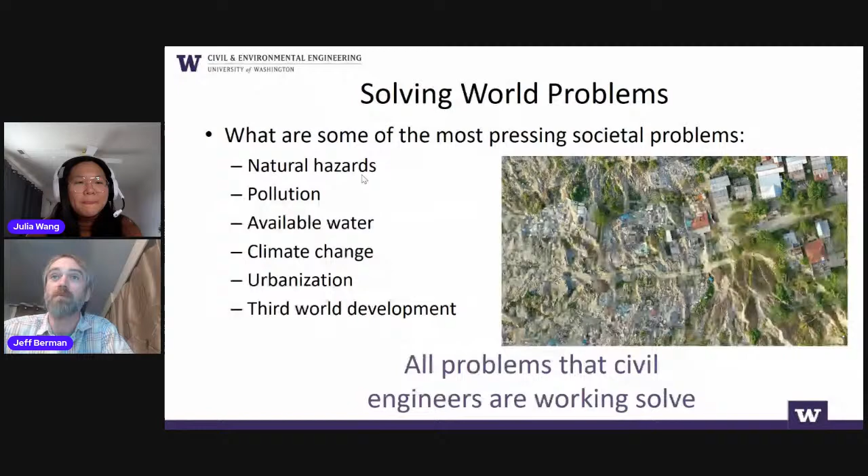So for those of you who don't know much about civil engineering, I just wanted to make a little pitch about the discipline that I love: helping people and figuring out cool ways to solve these really challenging problems. Civil engineering is really engineering for society, making society better.

There's structural engineering, which is part of civil engineering, which is what I do. There's geotechnical engineering, which is thinking about tunnels and foundations and landslides and a bunch of things like that. There's environmental engineering, making sure we have clean water and clean air. Transportation engineering, which I understand you've heard a bit about. Water resources engineering, which is making sure that we manage our water well and that we have availability of water. And then construction engineering, which is...

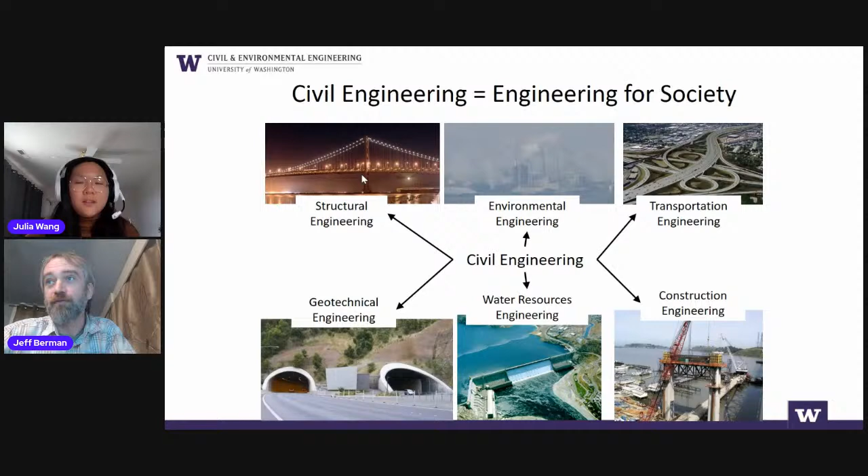Making all of these designs that come from the other parts of civil engineering actually happen, and figuring out how to build these big, fantastic solutions to these major problems.

So I'm a structural engineer. I thought I'd just take a minute and talk about what structural engineers do. We ensure safety and serviceability of structures, including bridges, buildings, and other large components of infrastructure. We try to creatively and efficiently use materials to achieve our economic and sustainability goals. And we often work in pretty big teams that involve people from a range of disciplines.

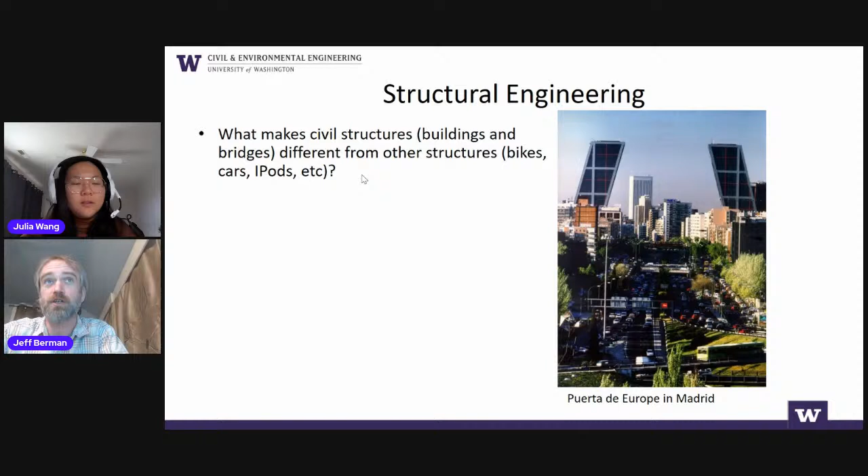So there are mechanical engineers who design bikes and cars, and they might even design the case for your iPhone and stuff, to make sure that your iPhone is robust. But there's a few things that set civil structures a little bit apart from some of those other structures.

Some of the things that we have to think about as civil structural engineers is really the scale of our projects are often very, very enormous. There's no prototyping, and we don't get to test our designs. We do a design and it's built and it's tested in the real world. There's no prototyping and chances to try things and get it right.

Often our designs are not repeated, they're very unique. Here you see the Puerta de Europe in Madrid, which is these two amazing buildings that are leaning, really, really interesting. There's only one set of those in the world.

The consequences of failure for civil structures are really, really high. If a building fails or a bridge fails, there are significant consequences. And our designs have to operate in this uncontrolled environment where we could have earthquakes and hurricanes, they just have to operate out there. That's why we have a whole licensure process. As a structural engineer, you have to get a license to actually design buildings and bridges. And they have huge social and economic impact, obviously.

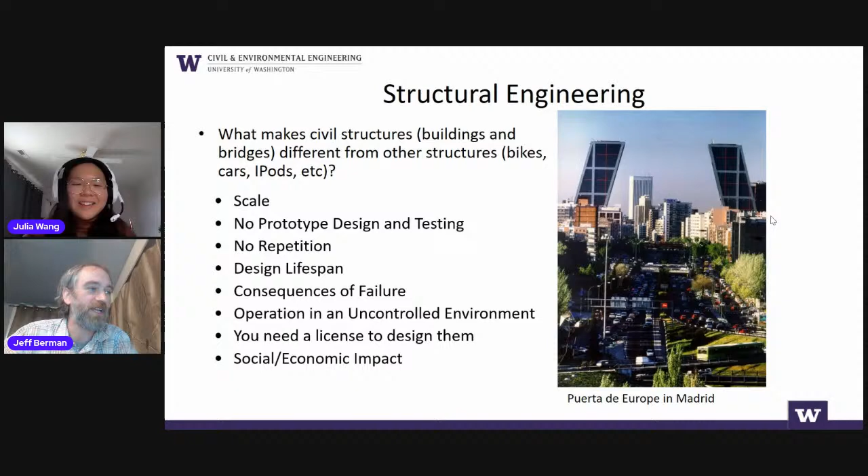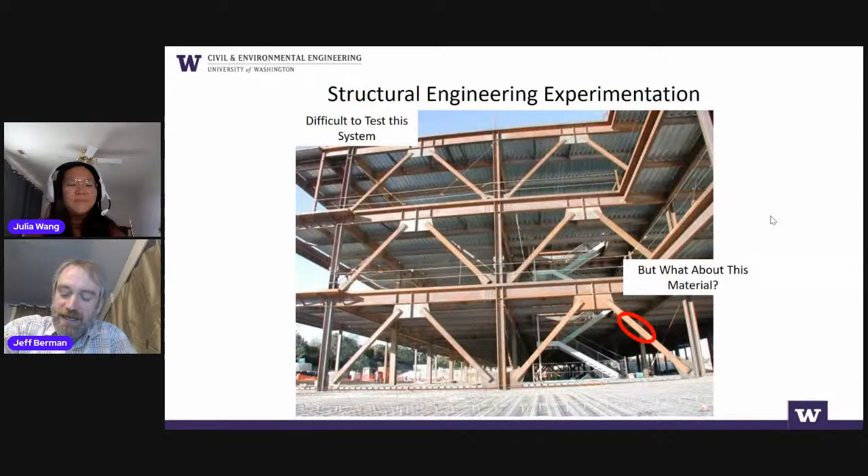So I did say it's difficult. We can't test this full building, right? It's not really possible to test this full building here. This is a steel framed building, and I don't know exactly what it's going to be, maybe an office building or something like that. But we do and can test, say, the material for the building, and we do that.

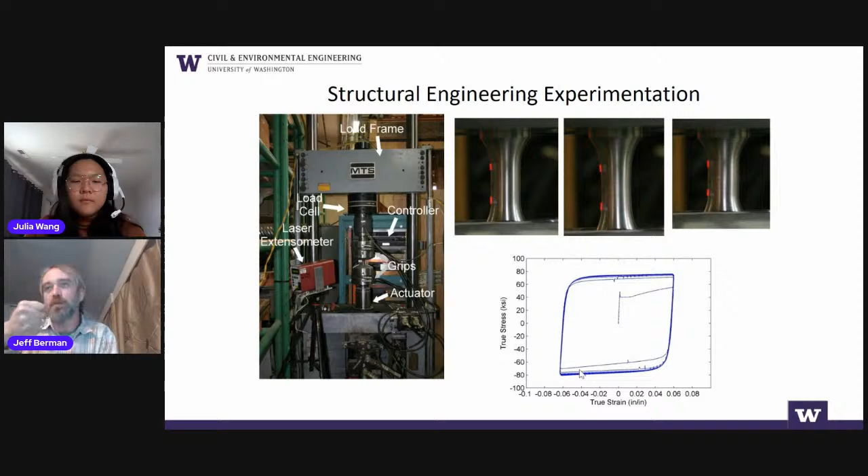So here's an example of in my lab, we're testing steel, just to make sure we understand the material properties for this steel. We put it in a machine like this, and we push it and we pull it, and we're able to understand its behavior, in terms of what we call stress and strain, or the force it takes to push and pull the steel versus the deformation of the steel, and that helps us understand its behavior.

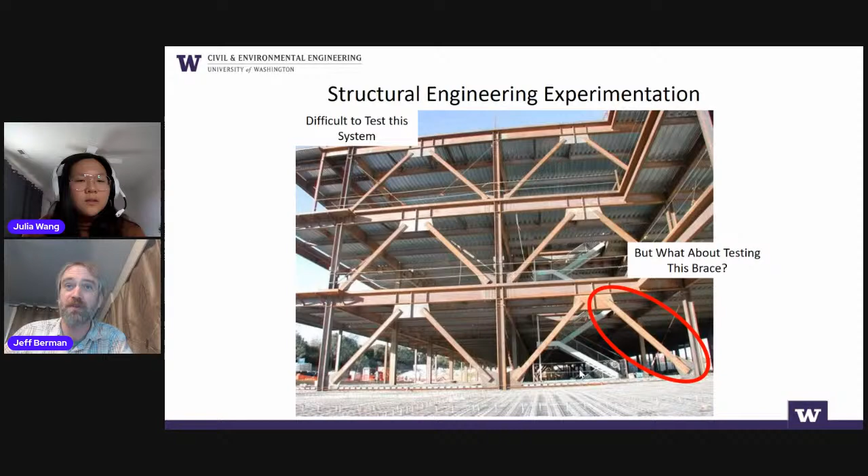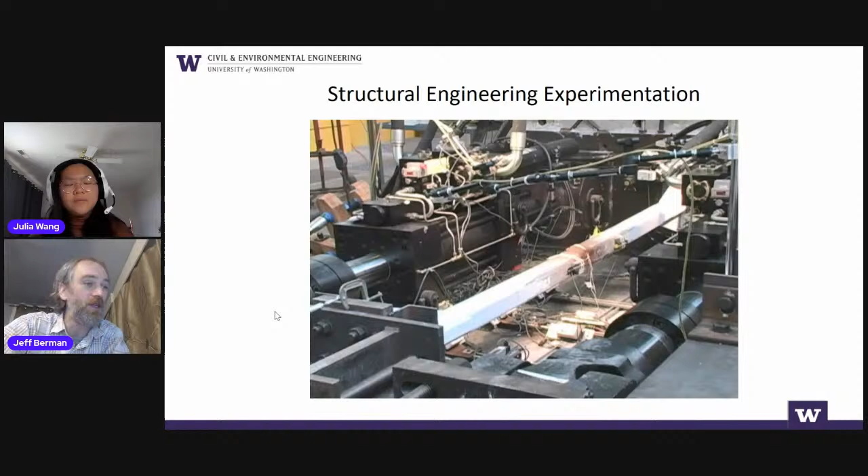I wonder, is this what they use- because I know in Japan they have a lot of earthquakes, and they've built their buildings to withstand those earthquakes. Do they use braces like these in order to do that? Absolutely, yeah. There's lots of different types of braces and things like that, and this is just one example. But yeah, absolutely, the technology used for resisting earthquakes in Japan and in the US is actually very similar.

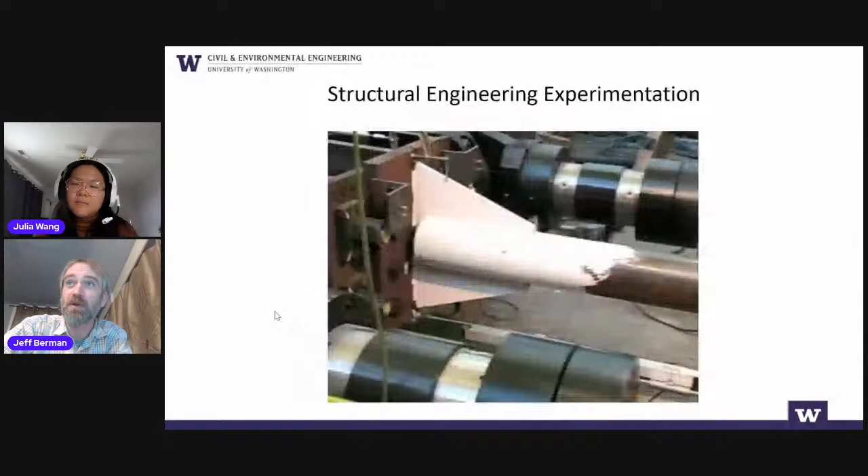And again, in my lab, we can't test the full building, but we can test, say, the connection. So just an example of some of the types of tests that we do to understand the behavior of the connection. This one's slowed way down, and we're going to see the failure of that connection, obviously. And my dog really liked it in the background there.

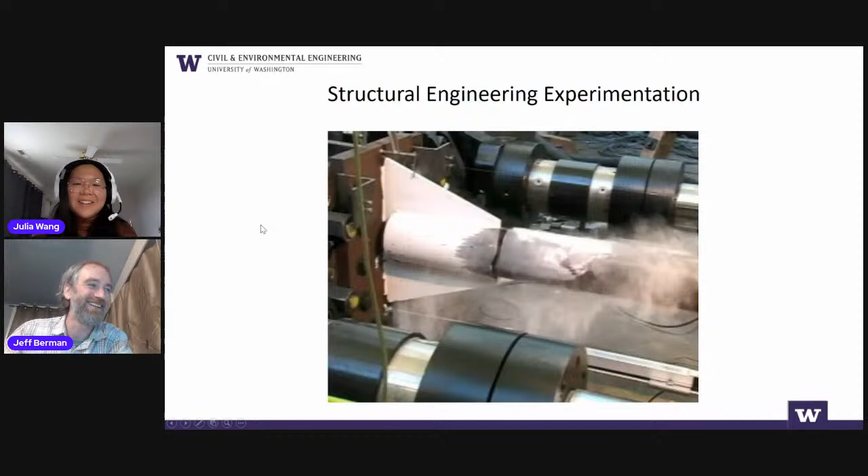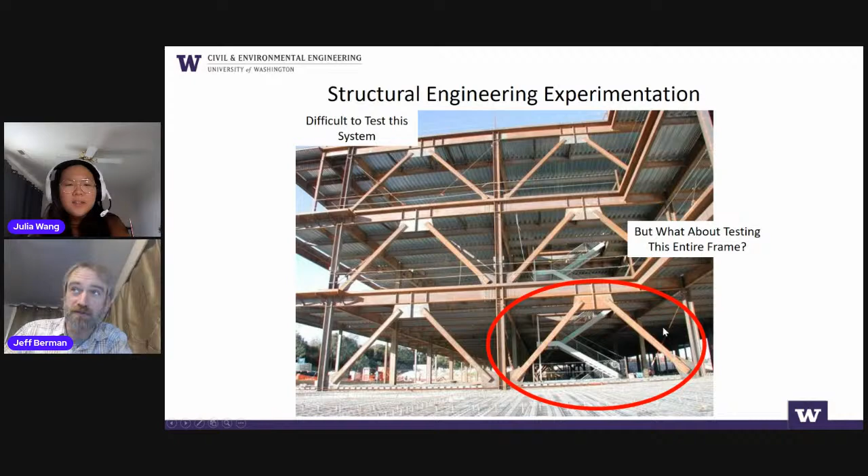There are some big labs around the world, and while they're not big enough to test this entire full 3D building, they might be big enough to test this entire braced frame, so we can figure out how that behaves. This is an animation of some testing where we actually were able to test a piece of the building. It's not the full building, it's just one braced frame pulled out of the building, and we're able to test that all the way to failure. You can see the braces fracture and do what they're supposed to do.

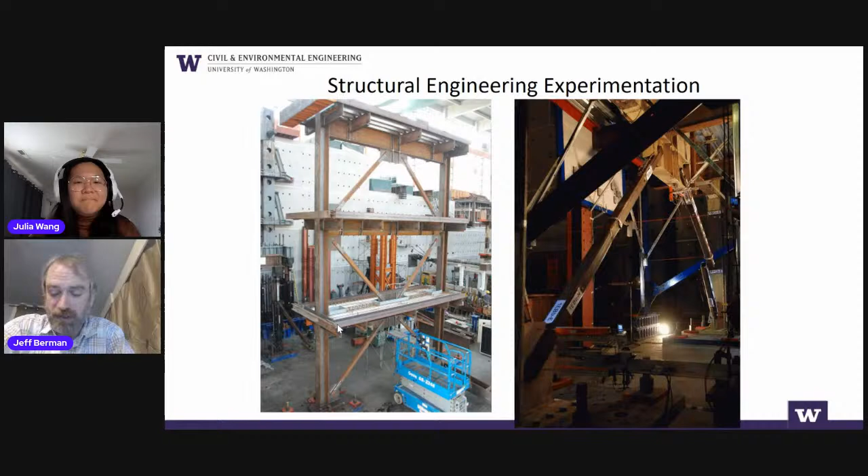The idea is that the braces end up damaged, but the beams and columns and everything that is carrying the vertical load and where the people are is fine. The building is safe after an earthquake, and you do have to go in and repair braces and things like that.

So what we do a lot of in structural engineering, and a lot of the work I do, is doing these kinds of tests both in the lab, and trying to learn about how things behave in the field too. Once we understand the behavior in the lab, we develop computational models that incorporate physics and a good understanding of mechanics, looking at material behavior and incorporating that into a complete model of the system.

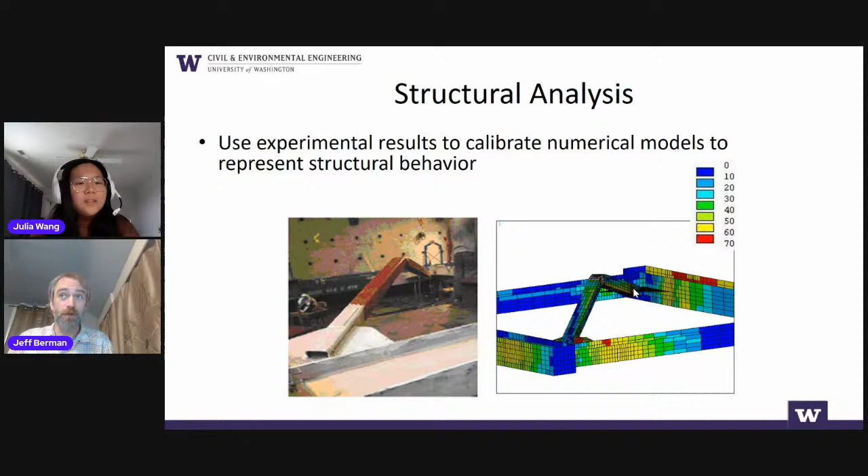Here's an illustration of us testing a brace in our laboratory, and then doing modeling in the computer that incorporates all the physical behavior we observe in the lab. We're able to simulate that behavior in the computer, and that's how we're able to go design safe structures for things like earthquake loads.

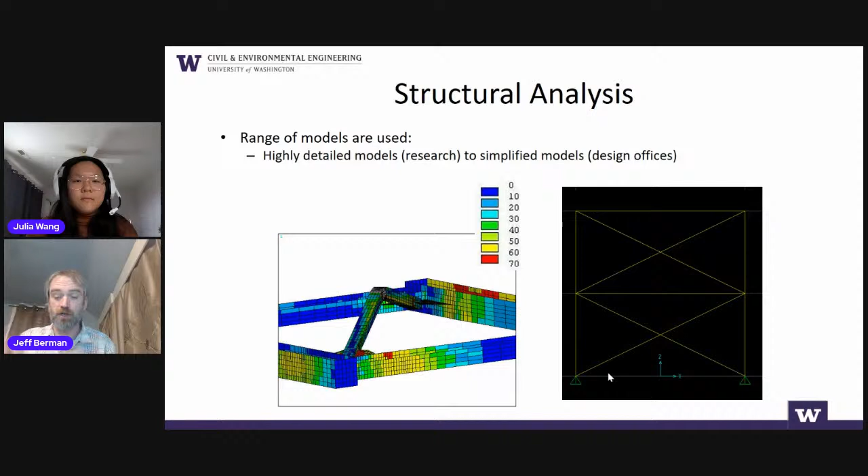We take these sophisticated models and simplify them for the designers who might design this braced frame in structural engineering design offices. They extend all of that and are able to design really large and complex buildings with the help of computers and models.

All this stuff is connected. We take our laboratory tests, figure out how to do really good computational models, simplify those models for design engineers to use in practice, and then they're able to safely design the buildings and bridges that make up our infrastructure. It's a whole process.

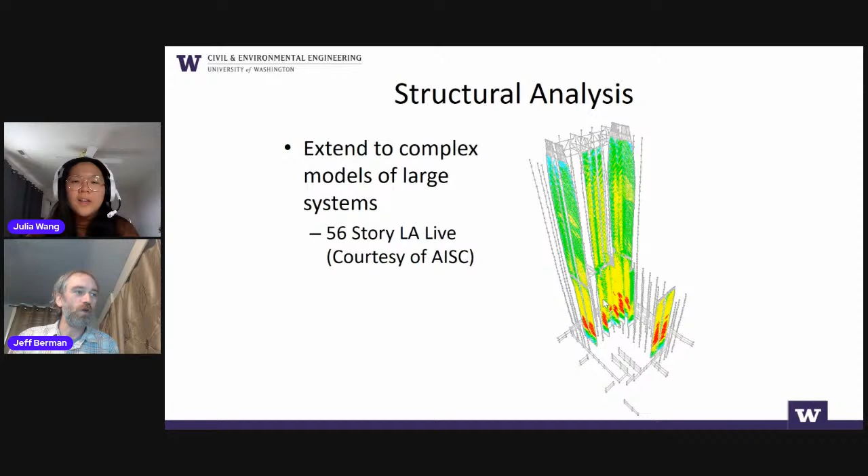If we think about what causes structures to be unsafe sometimes, what causes damage, there are natural hazards: earthquakes, hurricanes, tropical cyclones, tornadoes. There are man-made hazards, which could involve construction accidents, overloads, or malicious acts. There could be design errors or construction errors and lack of oversight. Much of the research and new innovation in structural engineering is aimed at improving structural safety in the face of these things.

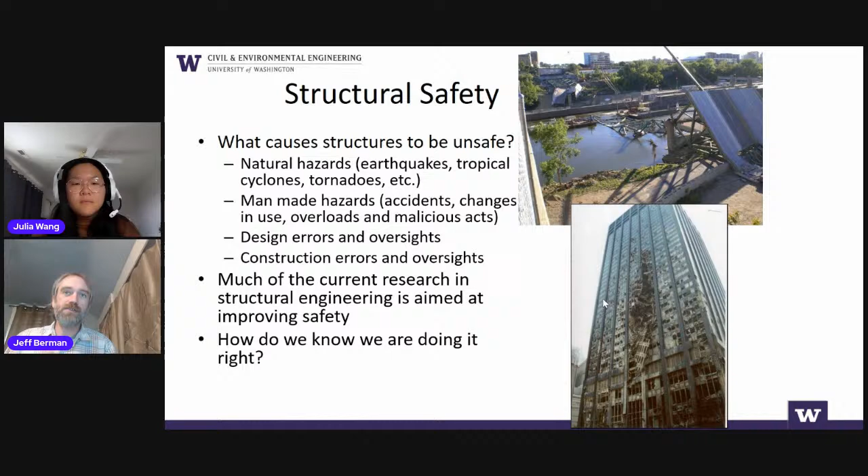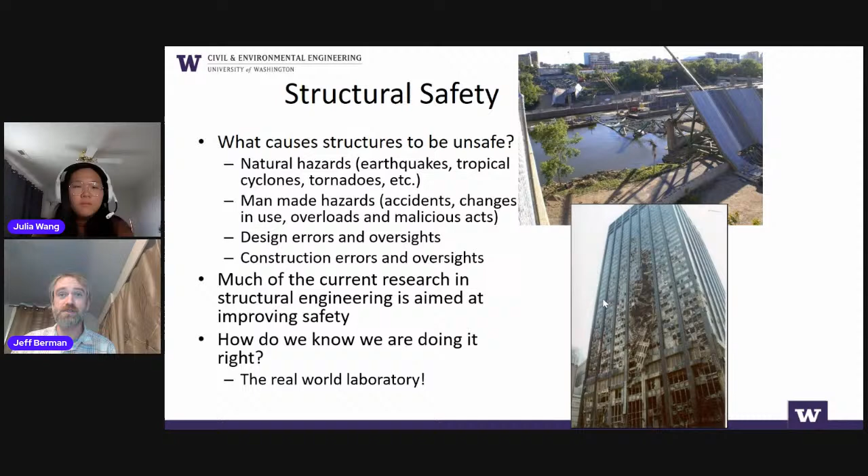One of our big questions is, how do we know that we're doing it right? I showed you some laboratory tests where we're working to test components, but we also have observations from the real world laboratory. That's what I'm going to talk about - how we learn using new technologies from the occurrence of natural hazards, and the work we're doing to understand how buildings and infrastructure perform in the face of large natural disasters.

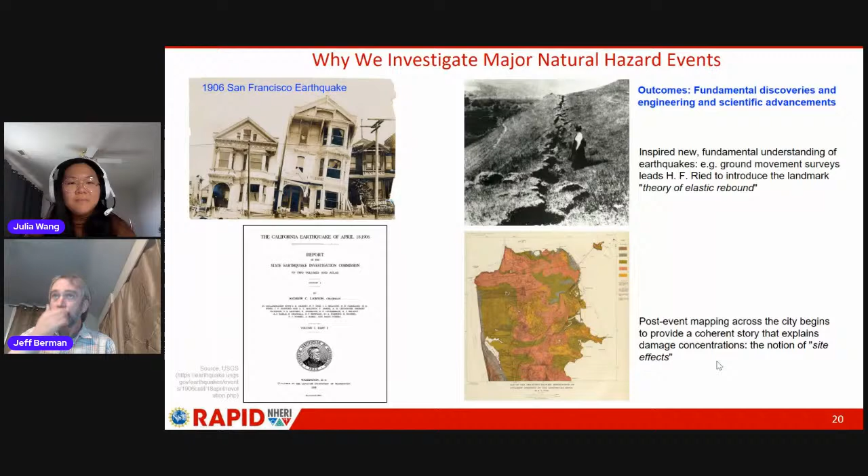Even as little as 10 years ago, there was this major earthquake and tsunami in Tohoku, Japan, and you may have read a lot about it. A lot of folks from the US, Japan, and all over the world went to Japan to try to figure out how we could learn from the impacts of that event.

They're making measurements about how far this building sank and moved, but they're doing it by hand, charting it out and writing things down. There's a lot of error in these manual measurements. But we were able to understand what happened to these buildings and to think about how we could do things better in the future.

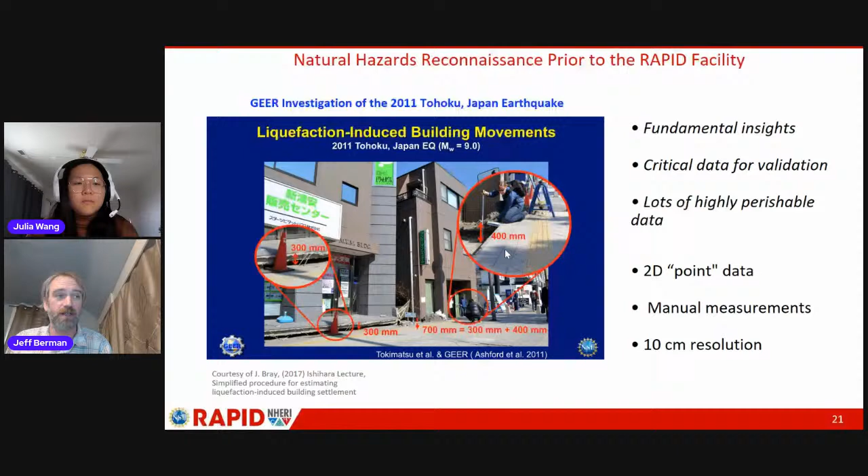But the center that I help run, this RAPID facility, we're trying to use new, awesome, modern technologies that allow us to capture data at really high accuracy and get these extraordinary pictures of damage to the built environment. So contrast those hand measurements that we were doing in 2011 with an investigation that we did in 2018 here.

This is using what's called LIDAR, a laser system. With LIDAR, we're able to send a laser beam out millions of times and read its response.

We set it up at a few different locations on a tripod. We can go to different locations, and then assemble all of this laser information into a 3D point cloud. It's essentially a 3D representation of everything the laser saw. There's a lot of work to assemble this, but we're able to get this full scene.

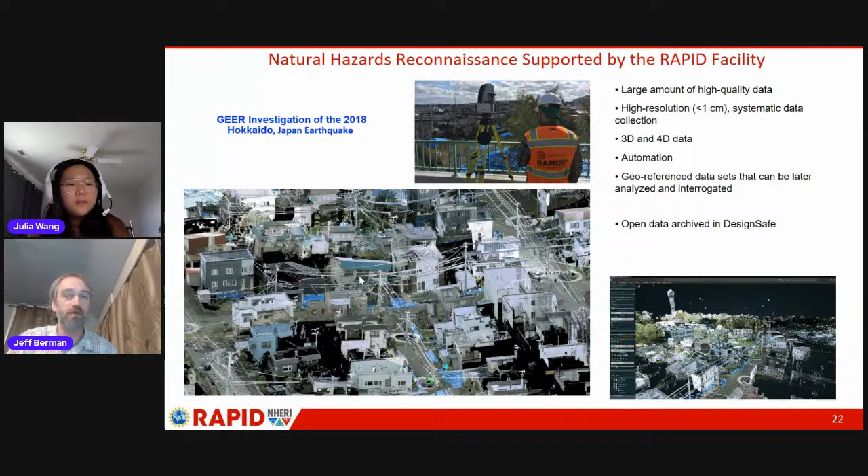In order to learn about that, we need all these case studies. We need to know that this building settled, and then we need to go figure out what the soil conditions were for this building, and then be able to know how much it settled. The development and capturing of all of these case studies is really important for us to figure out this type of damage that happens in earthquakes. So we have all these cool tools that we use to do natural hazards reconnaissance with.

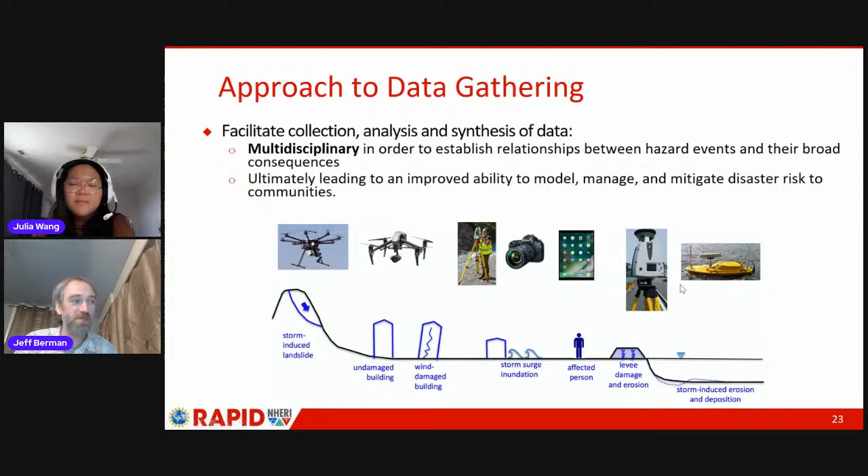So a lot of really interesting technology. I'll talk a little about some of the individual tools, and then I'll show one really cool example in detail of what we've done to understand building damage in Hurricane Michael. We have all these amazing tools.

We use advanced Geomatics Technologies, which let us capture 3D geometries of the built environment, including our LiDAR equipment and things like this. We have a bunch of equipment that lets us instrument buildings so we can understand how they shake in earthquakes, and instrument the ground around buildings to see how the ground is moving in earthquakes.

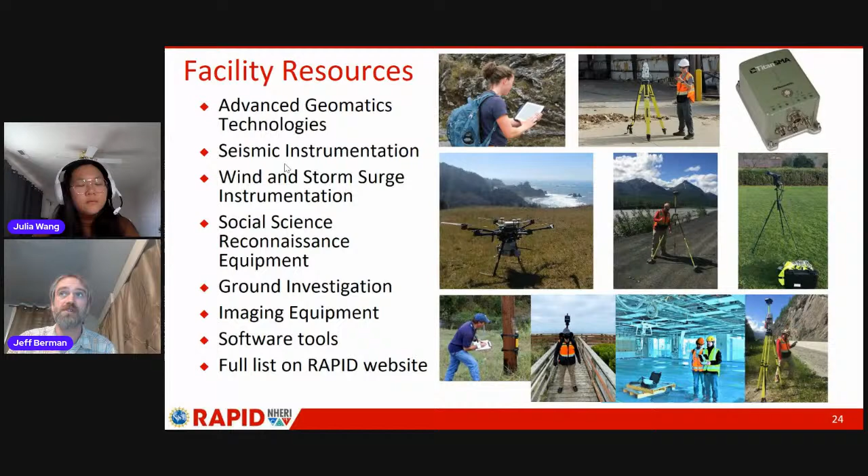Often earthquakes are unpredictable, so we can't put these instruments out ahead of time, but there are often aftershocks after earthquakes, and that's where we go and instrument a building. Once an earthquake happens, we get our instrumentation out really quickly so we can observe what's happening in aftershocks, which still tells us a lot about how buildings behave in earthquakes.

We have a full list of all this different equipment, and I'm going to talk quite a bit about laser scanners because that's one of the ways we can develop and capture these 3D images, 3D models of what a building looks like after a natural hazard.

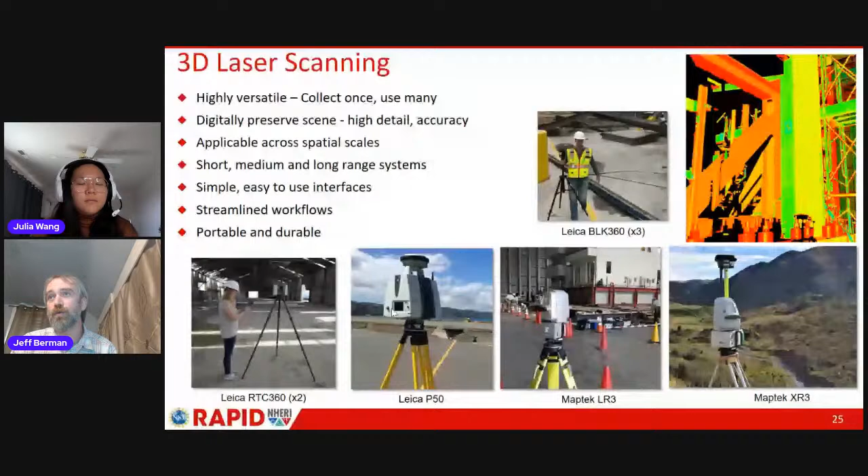I'll talk about how we use that information to understand what happened to the building during the natural hazard. We have a bunch of different laser scanners, and we don't need to know all those details. We also have a bunch of different drones, and the drones let us do a bit of what the laser scanners let us do, but on an even bigger scale.

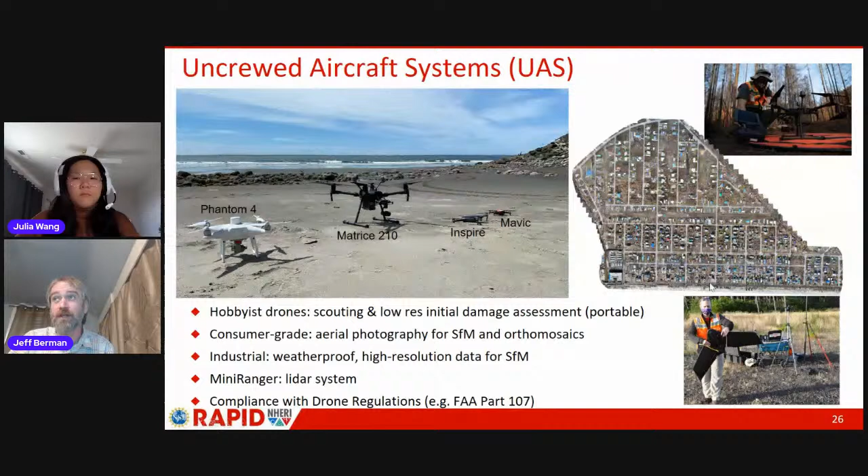We're able to take all of these images that the drones collect and put them together into a 3D model. So this is actually a 3D model of this entire neighborhood that was damaged in Hurricane Michael. We have lots of cool drones to do that.

And like I said, we have one drone that's really special, really big, really complicated and hard to fly, but it actually has a laser scanner on it. So this is a little laser scanner down here, and that drone has lots of special features so we can identify the exact, very precise location of the drone as it does its laser scanning down below. Here's an example of some of the data we can get from this drone.

So we go down to this landslide probably every 4 months, and we fly the drone with the laser scanner, and we're able to figure out how the landslide is actually moving and help Oregon State DOT figure out how to reinforce the hillside to slow the landslide down further so they don't have to repair the road as much.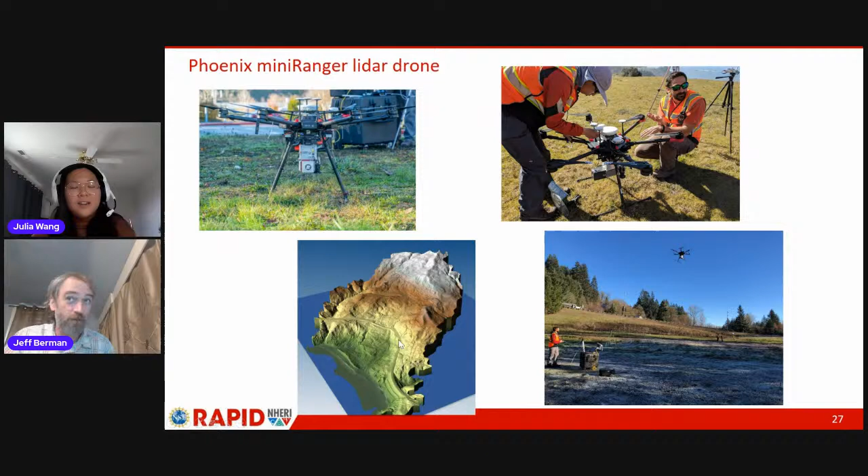So would that be considered pretty fast though? Yeah, I mean 0.5 meter a year is a big deal for this road. If the road is moving 0.5 meter, that means you have to repair the road every year, because it's cracking.

And then we've got all kinds of really fun imaging equipment — a couple different systems that are street view systems, a lot like the street view systems that Google drives around for Google Maps, where you can pull up 360-degree immersive environments. We've got 2 street view systems that are super mobile, simpler than Google's Street View system, but we can put them on a car and drive around right after a natural hazard event to document it really, really well.

We've got all kinds of different imaging equipment in addition to the Street View that lets us put together really interesting models. So this is a 3D model again, but this 3D model of this landslide was put together with images instead of laser scans. So it's not a laser going out; it's a series of images.

Because we can know the position of the camera, and things about the camera like the focal length, if we take pictures from different positions, we can figure out for each pixel in the image how far away the point captured by that pixel was from the camera. Using that information, we can assemble the images into a 3D model as well. That's called photogrammetry, or structure from motion — a series of computer algorithms that helps us do this.

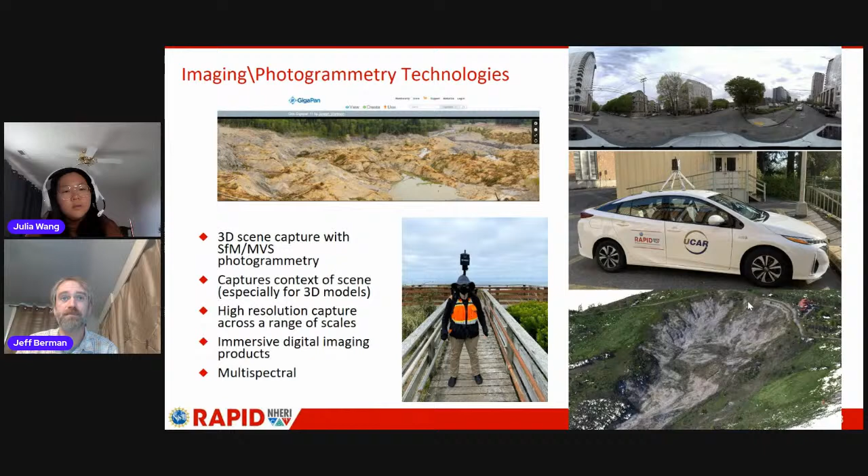Okay, thanks. And then I talked about our boat. We have a boat that we can send out to actually map the bottom of the surface as well. So that's all of our equipment. And I want to take the last 10 minutes to show you one example of how it's been used - our Hurricane Michael work - to show you a little bit about that.

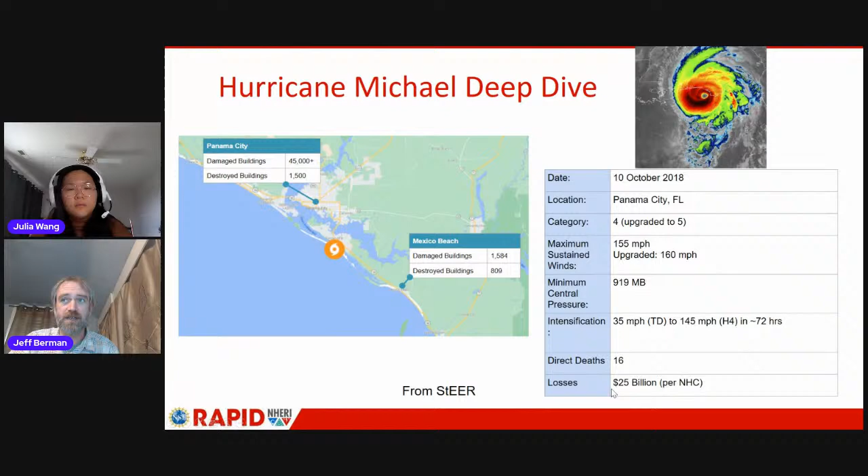Hurricane Michael was a huge hurricane. It was a Category 5 hurricane when it made landfall. Its impact was really around Panama City, Florida, and Mexico Beach, Florida. Those were the two communities heavily impacted. Mexico Beach, a small beach community, was pretty much totally destroyed - almost every single building there was destroyed. Panama City, a big city, had less damage, but still some really significant impacts. There were maybe 16 direct deaths, but over $20 billion, near $25 billion in losses from infrastructure.

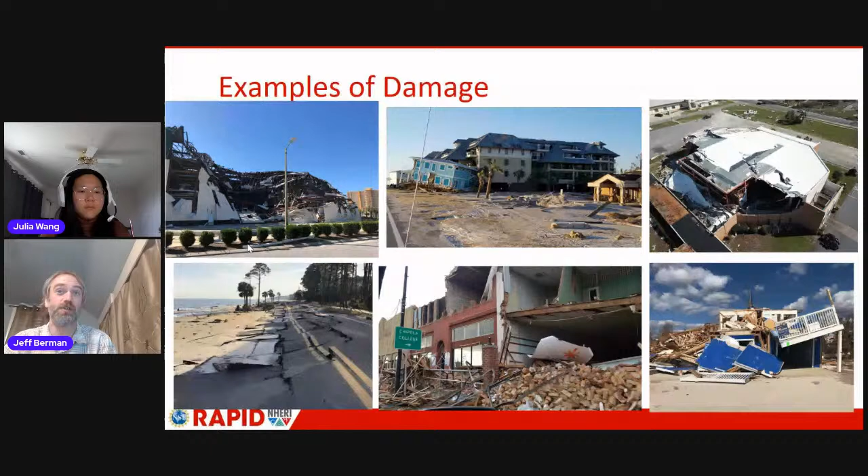There was a really significant storm surge associated with this hurricane. The water level was near high tide when the hurricane occurred, and the hurricane pushed a bunch of water up on land - that's called storm surge - and there was a major flooding event. When the water comes in during a hurricane, it's actually moving pretty fast too, and it can cause damage just from the flow of the water.

So we wanted to look at - there was a really special project, one focus we wanted to have. There was one observation made by the first people who went down and looked at the damage from Hurricane Michael: there were a lot of collapses of what are called large volume, low rise buildings. These are warehouse type buildings, but if you think about what we use warehouses for, they're really important. There's lots of economic impact. When warehouses collapse, often they might be storing some of the critical things needed to recover from a natural hazard event.

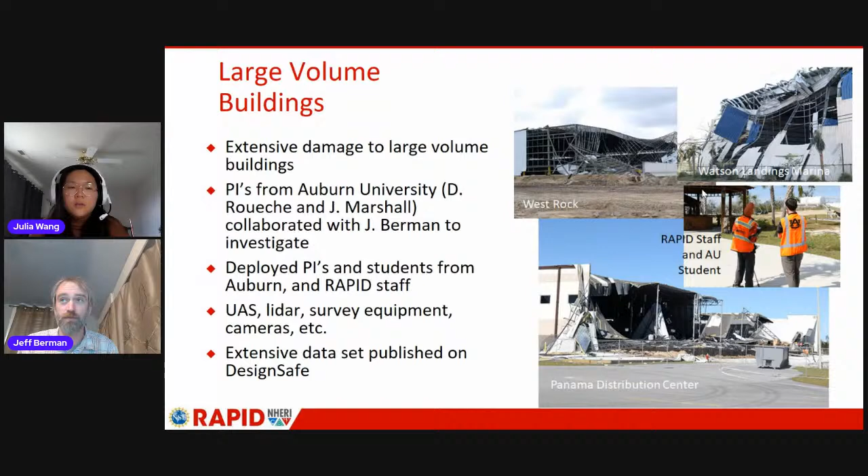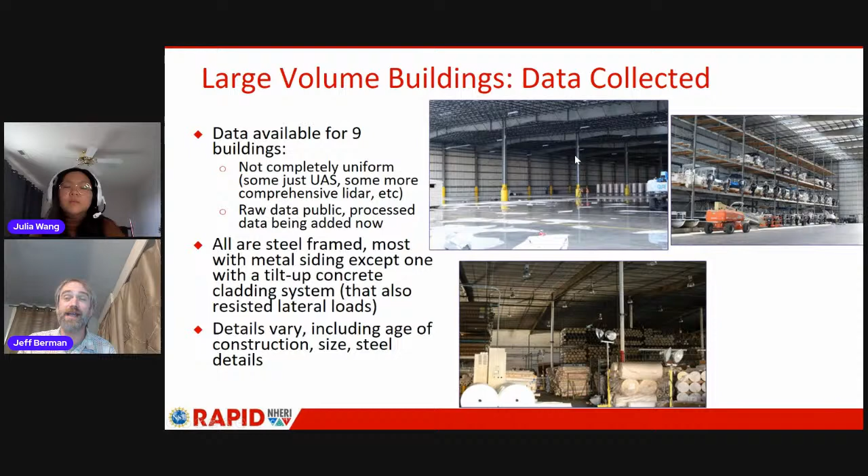So we went down and looked at what was the damage to these low-rise, large-volume buildings, and could we learn why they performed so poorly. They really did perform poorly - there was almost a 75% failure rate for these large volume, low-rise buildings. So we went in and tried to figure out what happened to them. We did very detailed studies of 9 of them, taking our laser scanners into these 9 buildings. Here's just a map of some of the buildings, and a bunch of them were on an Air Force base as well.

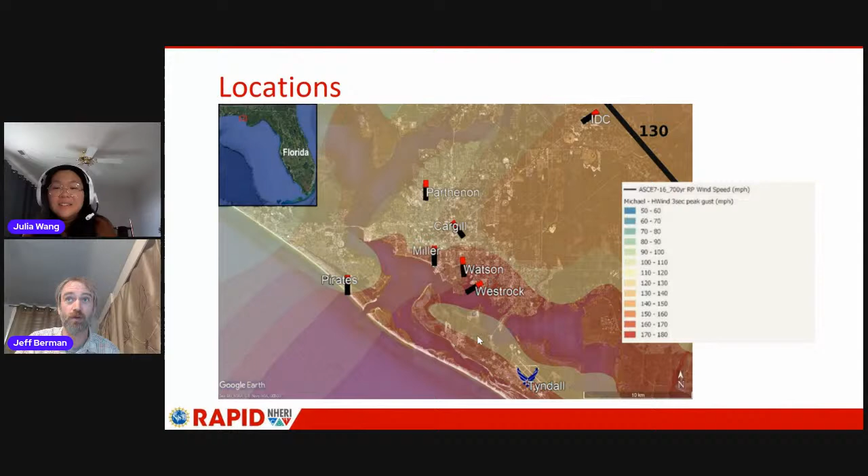It's called Tyndall Air Force Base, and it was heavily impacted. Here's a few of where the buildings were on a map, where the contours show the wind speeds. These wind speeds were huge - a Category 5 hurricane has wind speeds over 170 miles an hour in some of these locations. Really, really fast, really strong wind. And here's a link, hopefully this comes up.

But there's a link there. If it will come up. I know it will. Okay, there it is.

I want to show you the point cloud that we collected from some of these damaged buildings, and some of the really interesting things we can do with the laser scanned data. Here's one of the damaged buildings, and this one was a marine storage building, essentially storing boats.

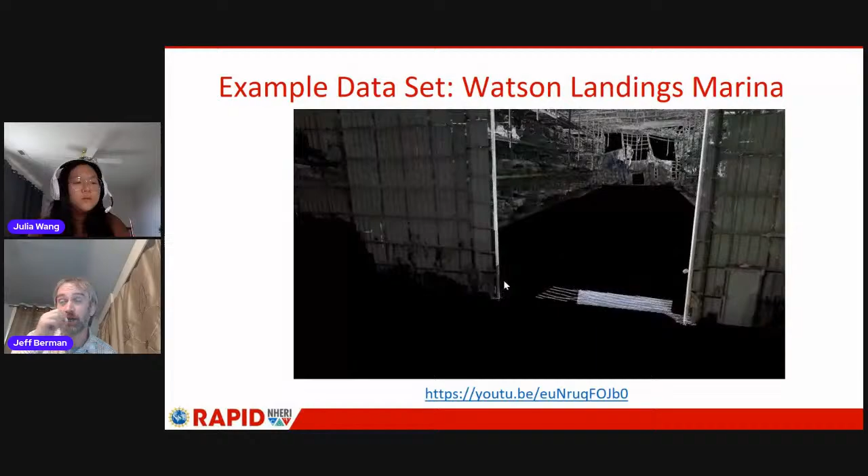You can see in the front, it collapsed from wind on the front side, and I'll explain how we've learned these buildings collapsed. They all collapsed essentially the same way, and our work in reconnaissance has taught us how they collapsed, why they collapsed, and what we can do about it in the future.

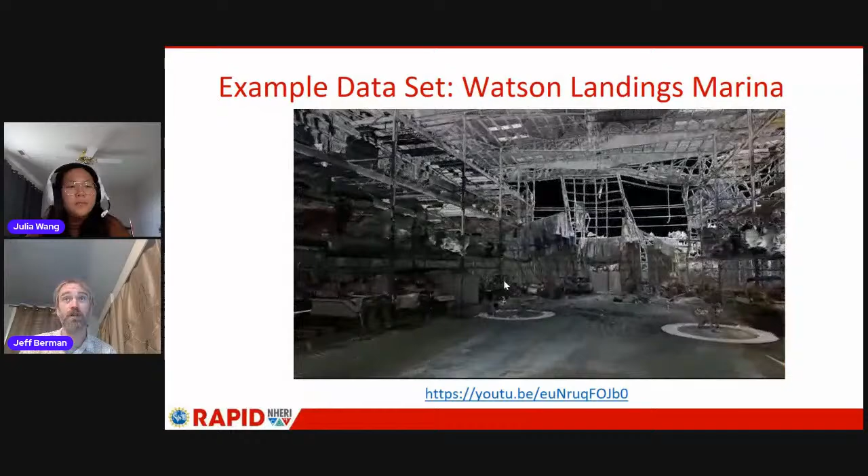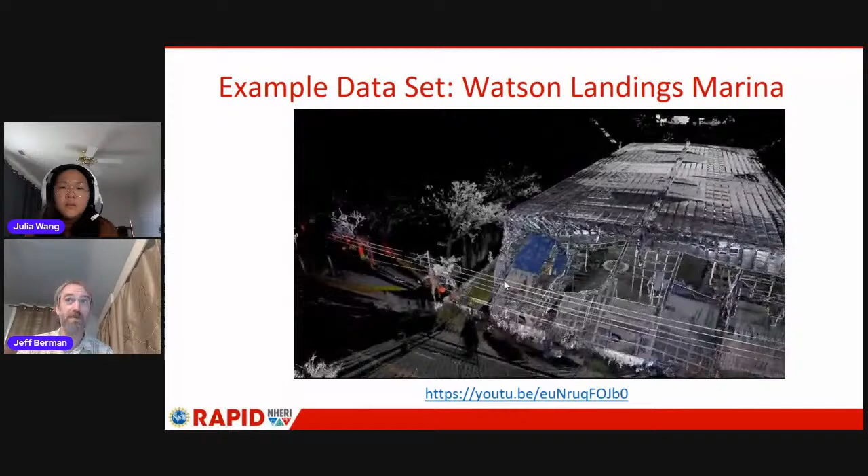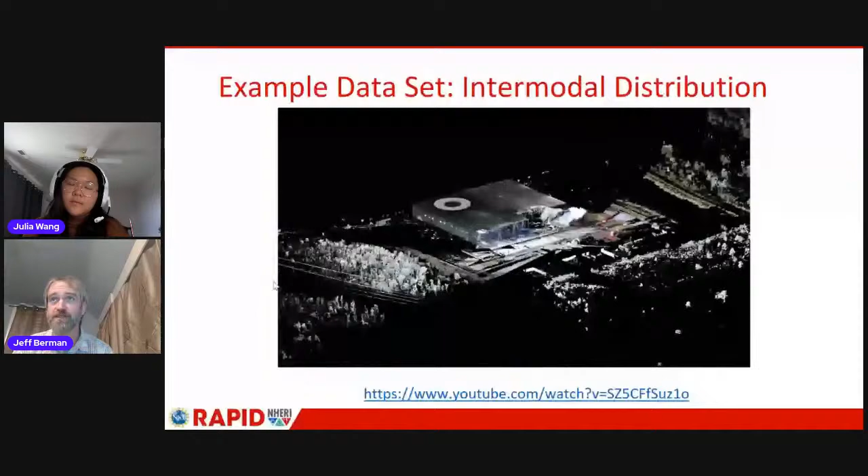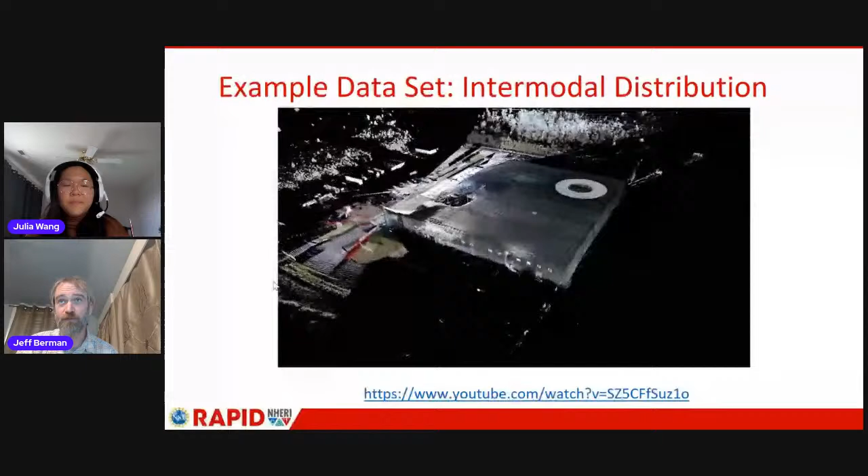So that was one of them, and I have one more point cloud to show of another building, a distribution center. It had all kinds of things in it, FedEx was using it as well. But you can see the roof collapsed and one side of the building collapsed, and we'll do a little fly through of the 3D model of this building as well.

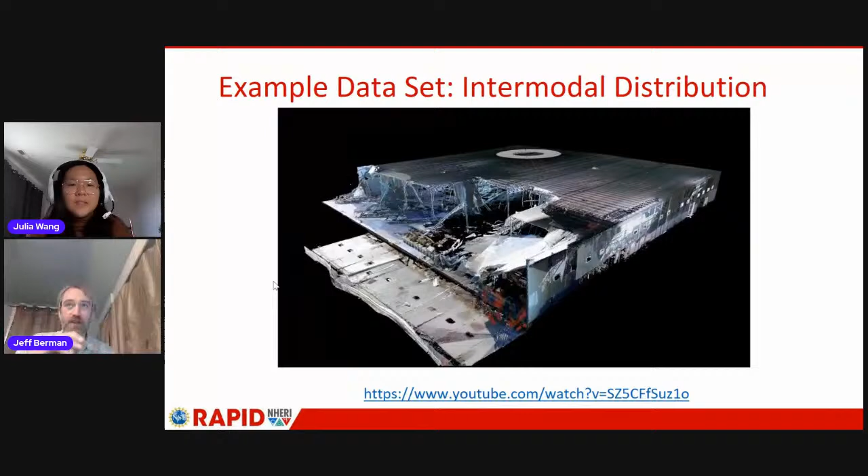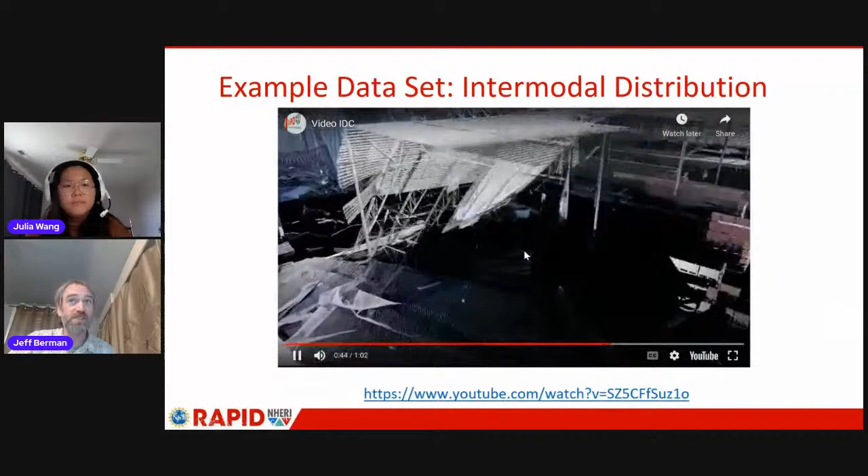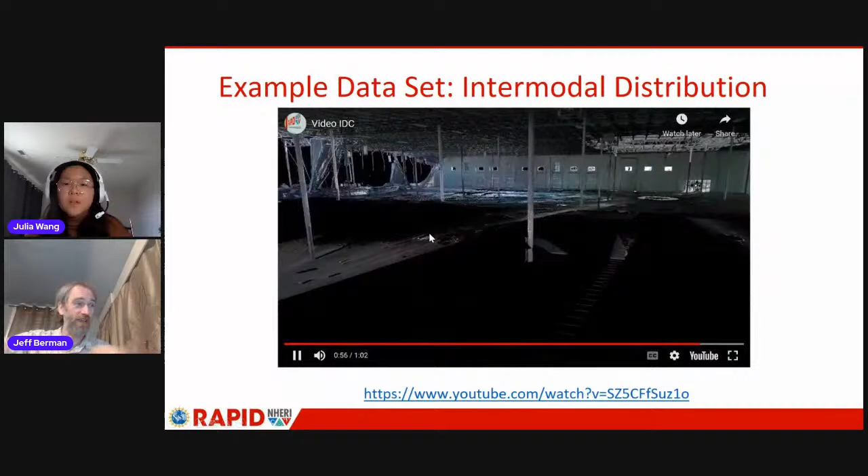You can see we're able to throw away and clean out a lot of the stuff that's unimportant to us. As a structural engineer, I'm not concerned about the contents, I want to know things about the roof truss and the columns and the roof itself. With the point cloud, I'm able to strip away the information that's not important about the structural system, clean out all that information, and just reveal the structural system itself, which is really important and interesting to us.

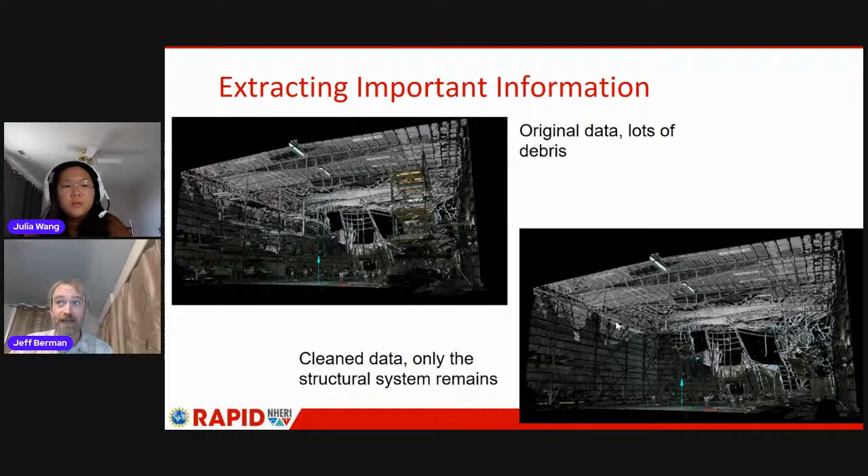Here's the marine storage building, and you can see the boat racks and all this stuff. And here's the marine storage building where we've cleaned out everything and revealed the structural system. There are some X braces here you can't even see in the original, but in our virtual model, we're able to remove the boat rack and actually reveal the structure behind it, because we took a lot of laser scans in this building, and the information's there.

So did you manually clean it out, or did the computer do it itself, depending on the information? Yeah, it's a little bit of both. There are some cool algorithms that we've written and other people have written that allow us to identify structural components and extract them from the cloud, but they're not perfect, and we often have to go in and do some of that manually ourselves.

Here's another example where this roof has collapsed, and what's really interesting is this roof system itself. That's how we're going to learn about what caused the building to collapse, what was deficient in the design, and why it couldn't resist the hurricane level wind speeds. We're able to identify the main structural components and extract them from everything else, so we can make measurements and really learn about what the structural system was and how it failed.

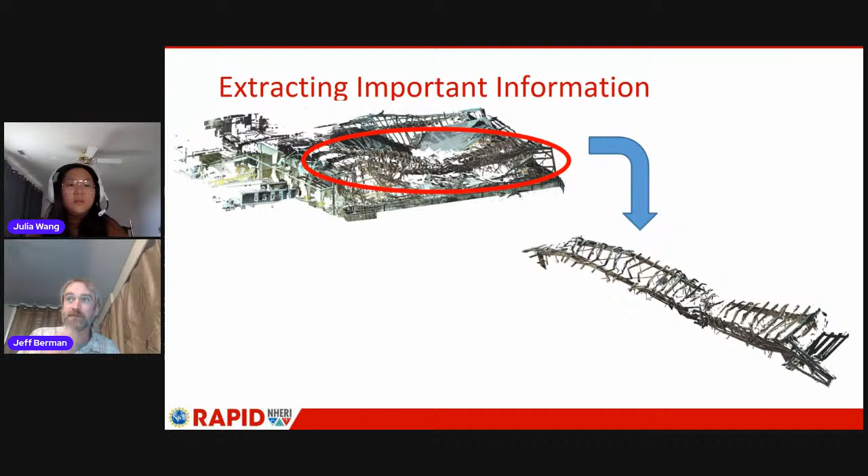Really, really cool, interesting things. And then we saw in the beginning, we do these structural models. We're able to go from these point clouds, these 3D models, which are just the geometry of the building, to actual structural models that help us understand the physics of what happened. And from there, we're able to figure out why these buildings failed.

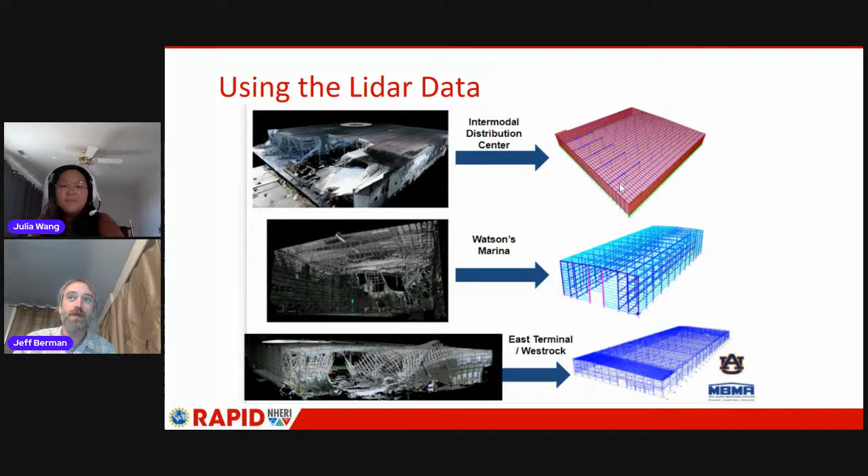When the wind was blowing toward the short direction of these buildings, the roof is responsible for carrying that loading, that push of the wind against this short wall back to the X braces a couple bays back. So these roof purlins are under an extraordinary amount of compression. They're being squashed in order to carry that wind pressure from this short wall back to the X braces, which are going to carry that load down to the ground.

And these roof purlins, they're being squished, but also as the wind is blowing on this side of the building, it's also creating turbulence as it goes over the building, and it's pulling those purlins up, creating this big suction. So these roof purlins are being squeezed and pulled up, and they buckle. As they buckle, the wall collapses, and it was the same failure mode in every single one of these large volume buildings that we went to investigate.

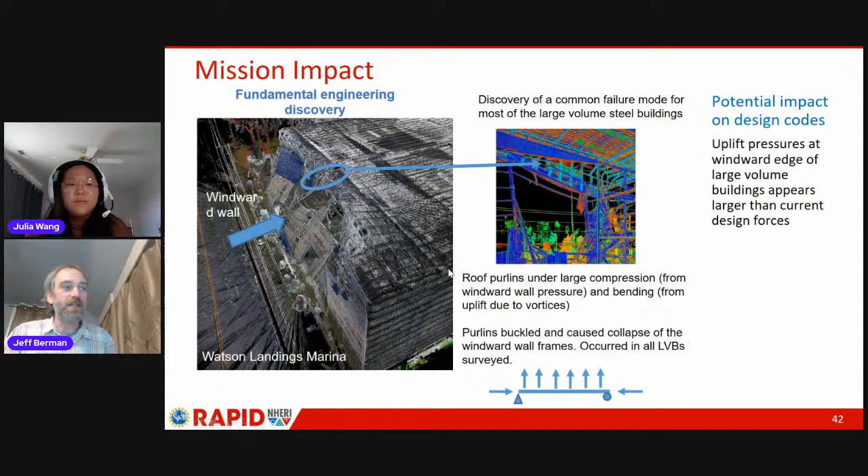So from all of this, using 3D models and understanding the physics, and using our cool new technologies, we're able to understand why these buildings failed, and we're able to make recommendations about how to avoid this in future designs. It's great.

That was my talk, and I think the big takeaways are, if there's four things to take away, it's civil engineers are working on really important, some of the most pressing problems facing society. As structural engineers, it's really challenging because we can't prototype, it's an uncontrolled environment, and there are really high consequences for failure. But we're trying in civil engineering to use all these new technologies to help us better understand how our designs are performing in the face of natural hazards, in the cases that I talked about.

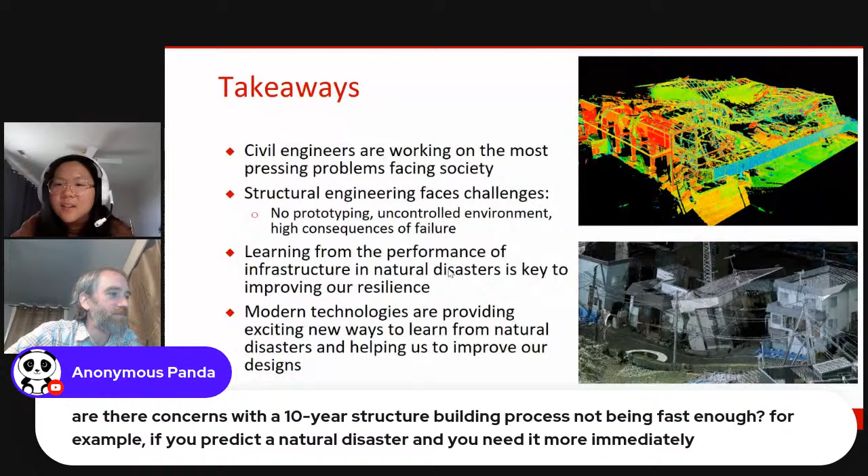All right, sounds good. The next one is, what are some of the major constraints of designing a building besides not being able to test the entire building?

Yeah, that's a great question. The constraints associated with the building, there's a couple of them. One of the big constraints is the site, the location where we're going to put the building. That defines a whole bunch of things - in terms of loading, what we might think about for loading, how fast we expect wind to blow in every location in the US where we would design buildings. So the site helps us define things like the expected earthquake shaking, the expected wind velocities. It helps us define the soils that we're building the building on.

And then the other constraints really have to do with occupancy and use. So how is the building going to be used? That's why, as a structural engineer, we work really, really closely with architects, because they're the ones thinking about the functionality of a building and how it's designed, how the building will look in the end, and how it serves its function. So that's probably the single biggest constraint involved in constraining the structural design - making sure that the structure also satisfies the architectural goals as far as its use.

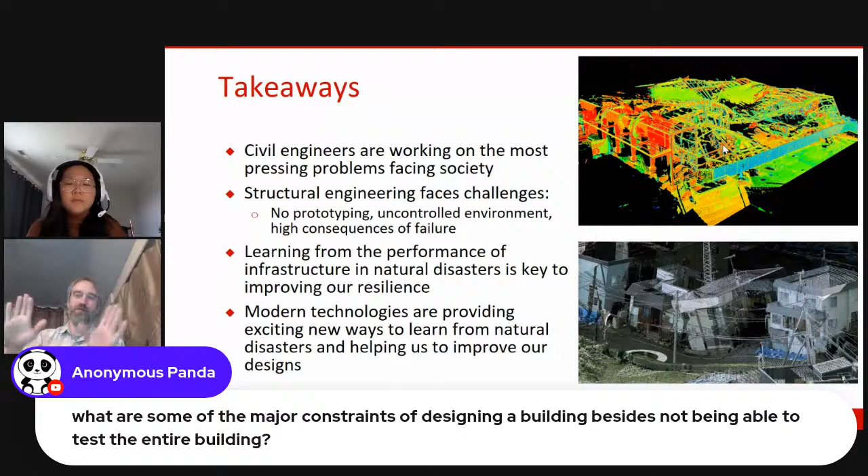So were those warehouses all made of the same material? Yes, those large volume buildings that had collapsed were all steel buildings. They all had steel frames, and then different materials for the skin of the building, but the skin is not part of the structural system—it's just keeping people dry on the inside. The structural system in all those cases was steel.

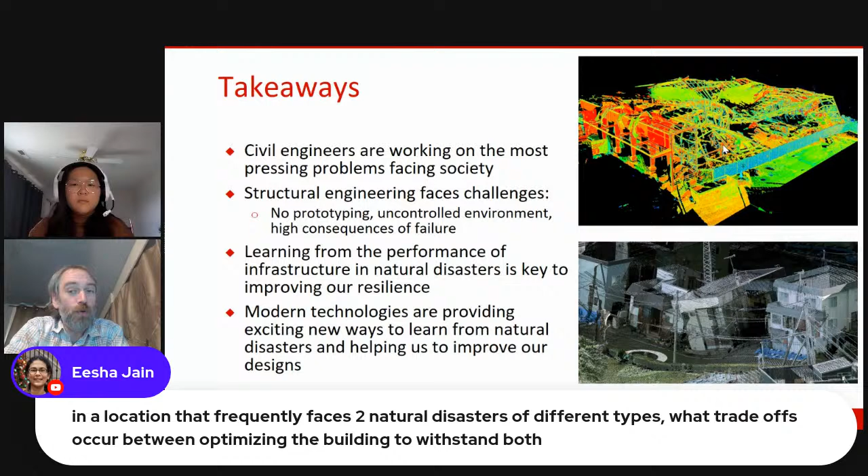The next question: in a location that frequently faces two natural disasters of different types, what trade-offs occur between optimizing the building to withstand both? That's a great question. Often what we do is design and think about both types of natural hazards, and we usually try to define the expected life of a building—today that's often somewhere between 50 and 100 years. Then we think about, within that 50 to 100 years, what is the probability it will see wind speeds of a certain velocity or earthquakes of a certain intensity. We treat this probabilistically, using statistical methods to quantify the likelihood of those hazards occurring, and whichever is a combination of most frequent and most intense will govern the design. We go through a process considering the intersection of how frequent and how intense the hazard will be to determine which one governs the design, and by doing that we consider both hazards.

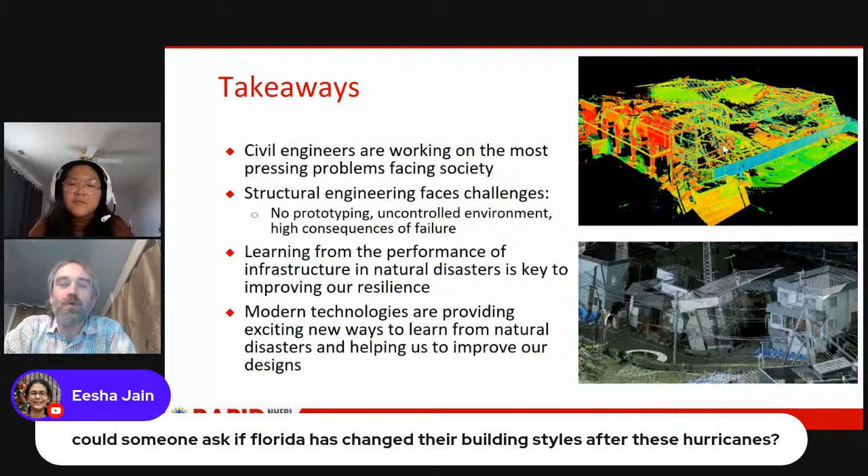That's really interesting. Next: has Florida changed their building styles after hurricanes like Hurricane Michael? Yeah, we're working on it. It's a slow process, and there's a lot of politics involved—it's not as simple as just the engineering. The engineering is actually the easy part; we know why these buildings failed and how to do them better. But that's going to cost money, and it's going to require laws, rules, and updated building codes. That's a social and political process, and that's actually almost harder than understanding why these things behaved the way they did and how to do it better.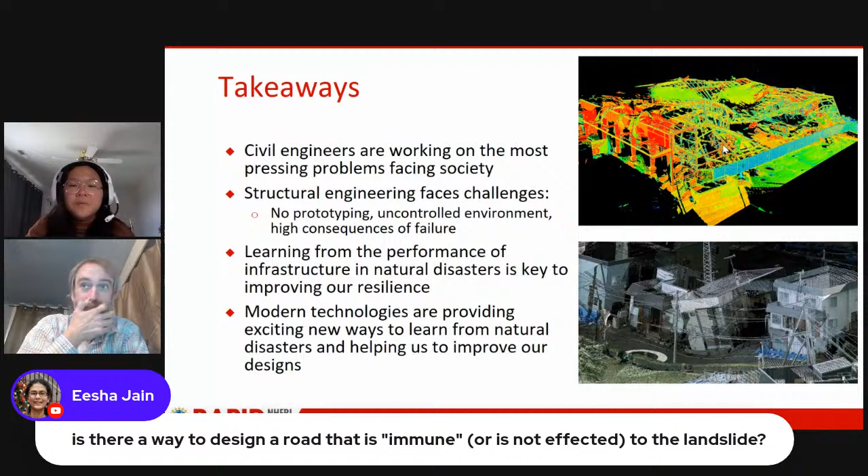Is there a way to design a road that is immune to or not affected by a landslide? Yeah, absolutely, with a big enough budget we can do that. That landslide I showed at the beginning affects maybe two football fields in width, about 200 yards or so. You could easily bridge the landslide—build a bridge with foundations at each end, spanning over the landslide, and the landslide would move underneath the bridge with no problem. But that's going to cost a lot of money and won't be an easy design. As with a lot of challenges in any engineering discipline, there are trade-offs between the right design for performance and the most economical design.

I didn't really think about bridging—that's an interesting idea. The next question: what happens to all the destroyed material? Does it go straight to the landfill, or can it still be reused? That's also a great question. When natural hazards like this occur, it is a huge environmental impact as well.

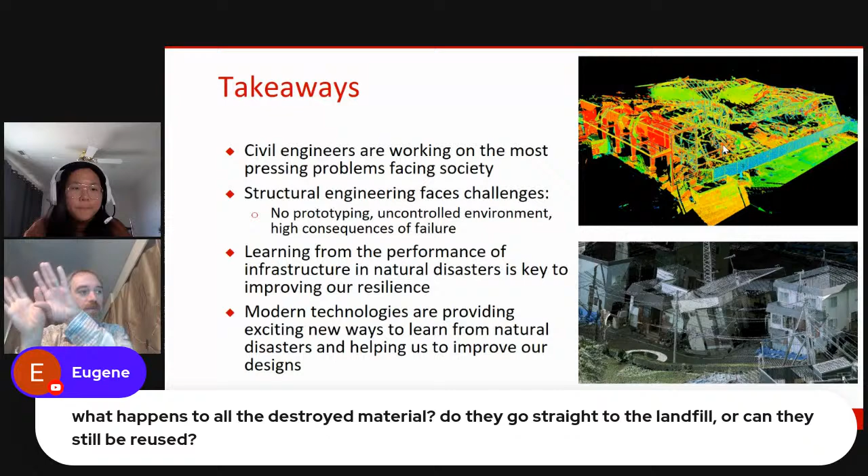We're working on using technologies like imagery, laser scanning, and multispectral images, where you capture wavelengths beyond just red, green, blue, to rapidly identify materials so we can determine what can be reused or recycled and what can't. Using these modern technologies, I think we can do a better job lessening the environmental impacts of natural hazards.

That's great. Okay, next question: what lessons do we learn from the Fukushima nuclear site? I don't know much about this, but...

Fukushima is the nuclear power plant that was damaged in the Tohoku earthquake and tsunami in 2011 in Japan. The nuclear reactor failed and there was nuclear fallout. Regions near the plant are probably uninhabitable for a very long time, and it's a very expensive cleanup effort. It's one of the worst nuclear disasters that has happened.

We're learning a lot about nuclear facilities in earthquake and tsunami regions, where there are significant natural hazards. We're learning about the cascading way failure happens in complicated infrastructures like a nuclear power plant, and ways that redundancy can be built into these systems to make them pretty much fail safe.